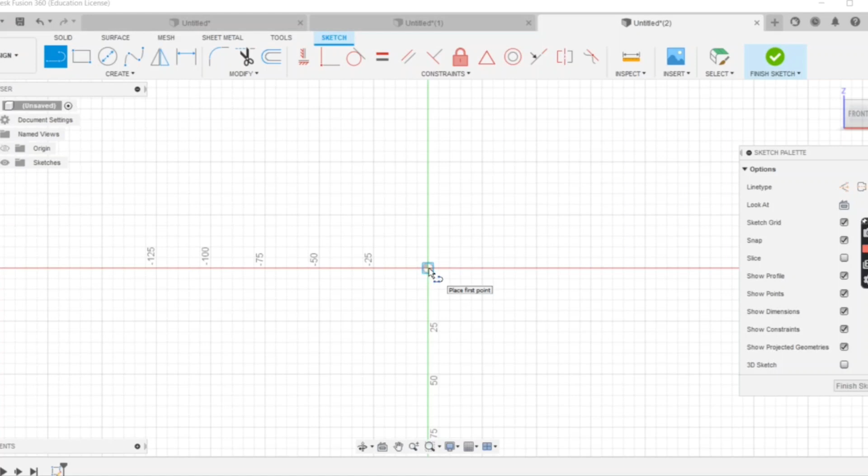First click on create menu and create sketch. Use front axis view and then use shortcut L and draw a line of 135 mm and the other two lines of 23.40 and 45 mm. Then select the curve option and draw a curve from 45 to 23.40. Use a green line to adjust your curves and then click on finish sketch, and then you can adjust the curve from blue lines as well.

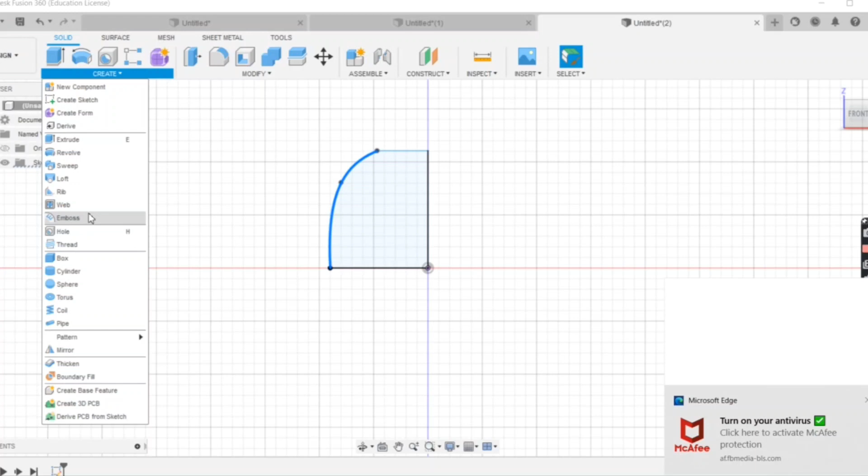Under the create menu, go under the revolve option and then select the body you just created, and then for the axis go with the Z axis and then click OK.

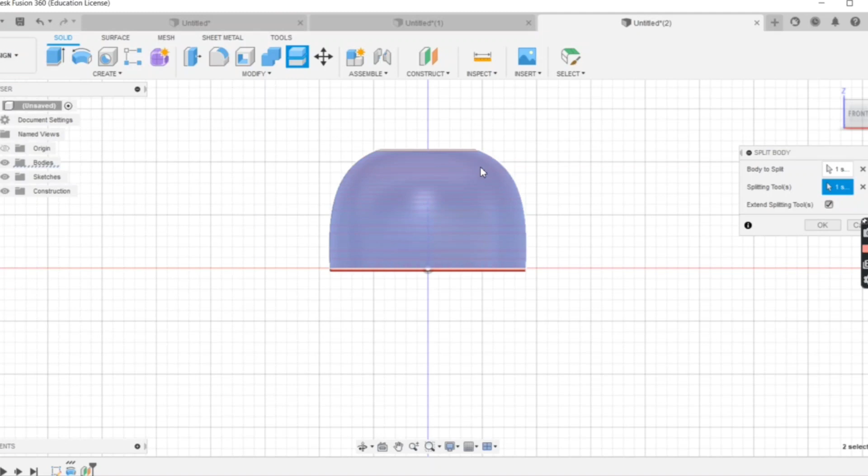Now we will divide it into another body. Under the construct menu, go for offset plane and then type -8, and your offset plane is created. Under the modify menu, go for split body, then select the object and then select the offset plane and click OK. So your body is now divided into two bodies.

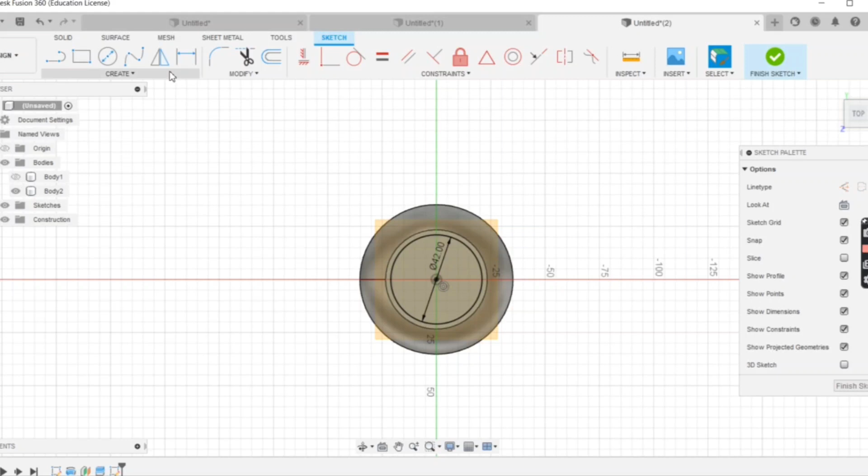Hide body number 1 and go with body number 2. Draw a circle of 42 mm, you can use shortcut C. We will create a holder-like structure for the lamp. Use shortcut E for the extrude menu and then select the circle you just created and drag it down, using the cut option instead of any other option, then click OK.

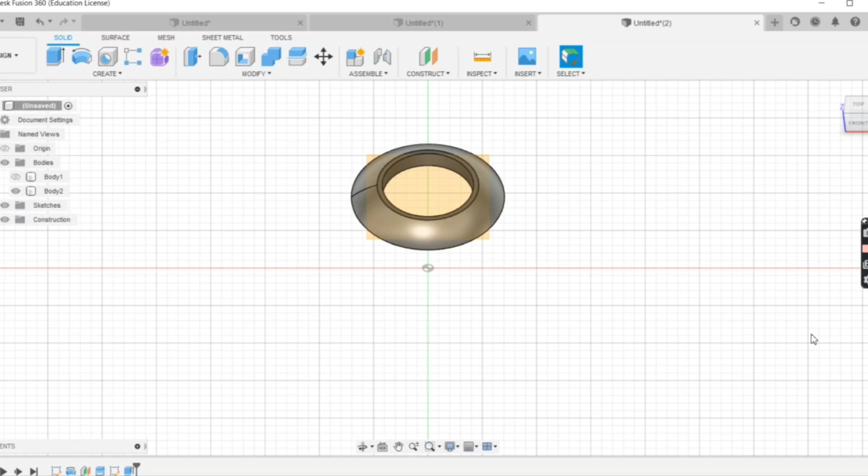So you will see a holder-like structure appear. We will hide body number 2 again and go with body number 1, and you can see a beautiful structure.

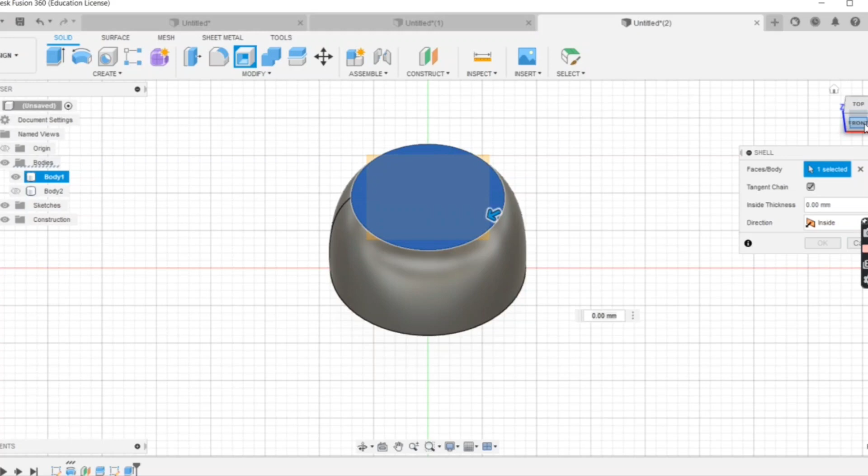Under the modify menu, go with shell option, then click on the top surface and then click on the bottom surface, so we will create a hollow surface. For that, again type 1.6 mm and then click OK.

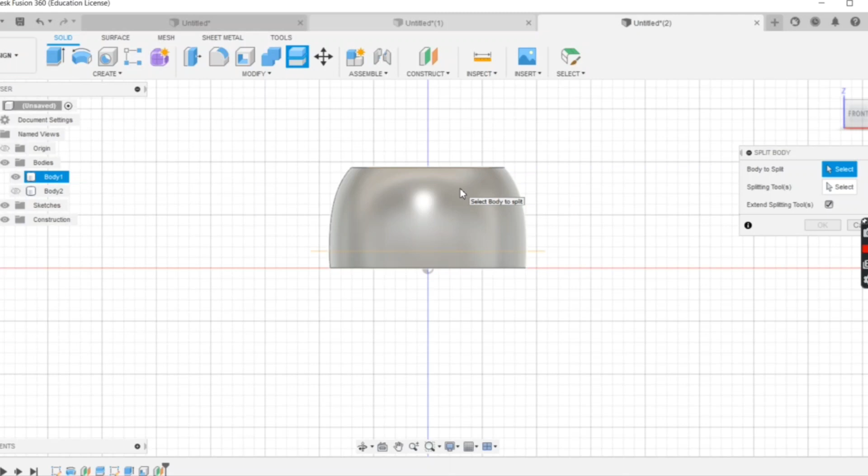We will divide this body again into another body so that you will see two surfaces, top and bottom, and in the middle you will see a design. Use the same steps you used to create body number 1 and 2. Under modify, use the split body option, select the body, select the offset plane and click OK. So you will see your body is now divided into 3 bodies, but we will work with body number 1, so hide body number 3 as well.

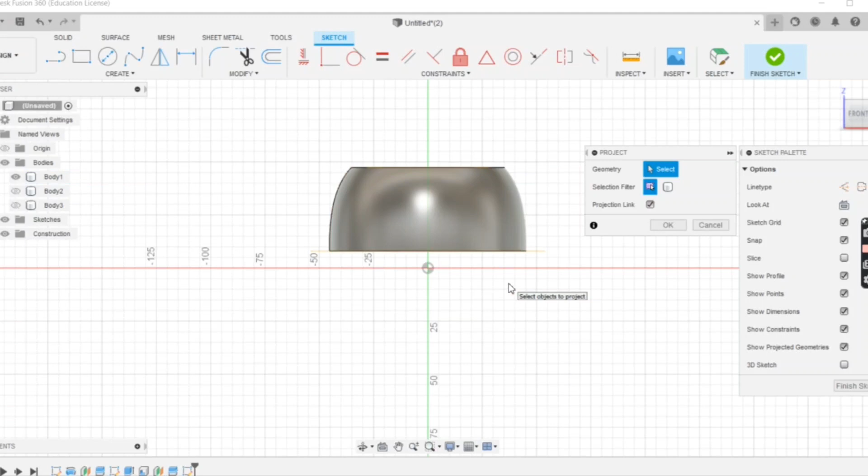Now we will work with body number 1. Under the create option, go with project, then select the project and select the body. Don't select anything else, and then draw two parallel lines or any lines you like according to you. I'm going to go with parallel lines.

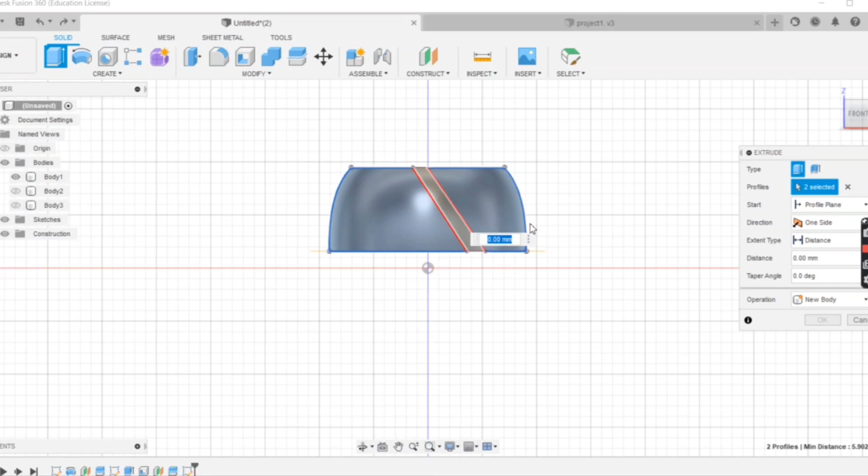Draw two parallel lines and then use the extrude option, shortcut E. Select the two strips which you just created, and select only the two strips. Don't select the entire object, because this will just eliminate the strips.

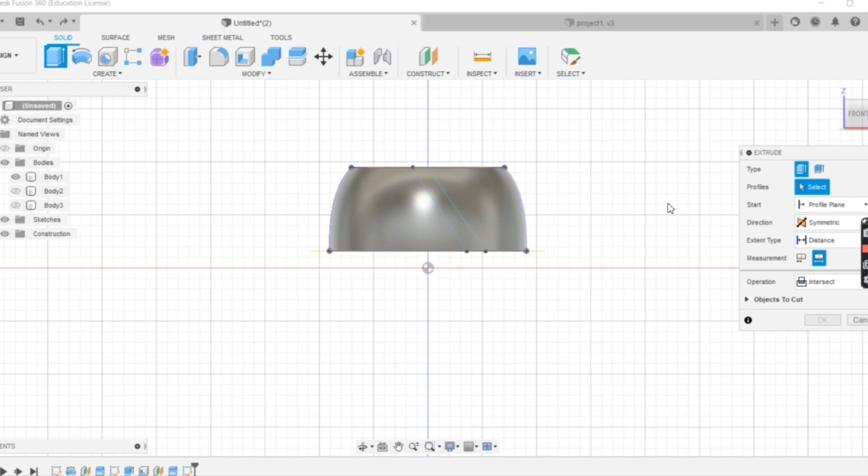Then go for symmetry on both sides. Then use intersection, don't go for cut this time. Then in this option select 'objects to cut' and again select the strip, then click OK.

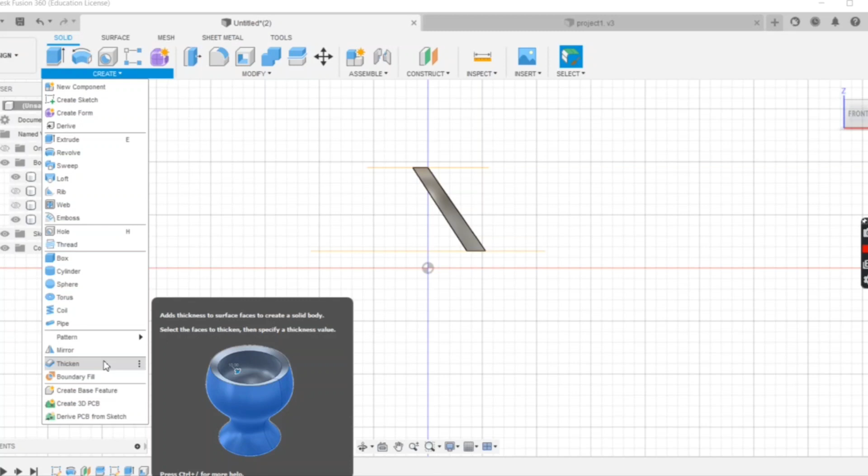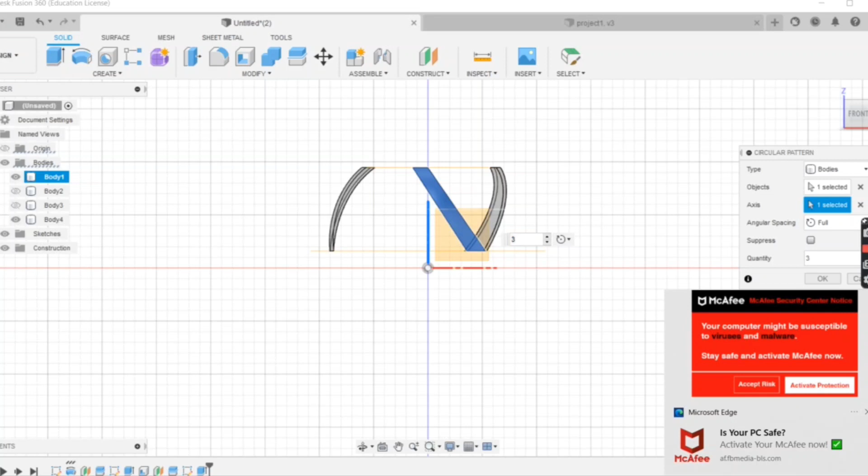So you will see a strip appear now. Under the create menu, go with the circular pattern option and click on the pattern. Select the object, select the strip, then select the body option and select the strip. For the axis, go with the Z axis and you will see a dialog box appear asking how many strips you like. I'm going to go with 8 and then click OK. So you will see a beautiful pattern appear.

You can do the same again with the opposite direction strip, and you can type as many strips as you like.